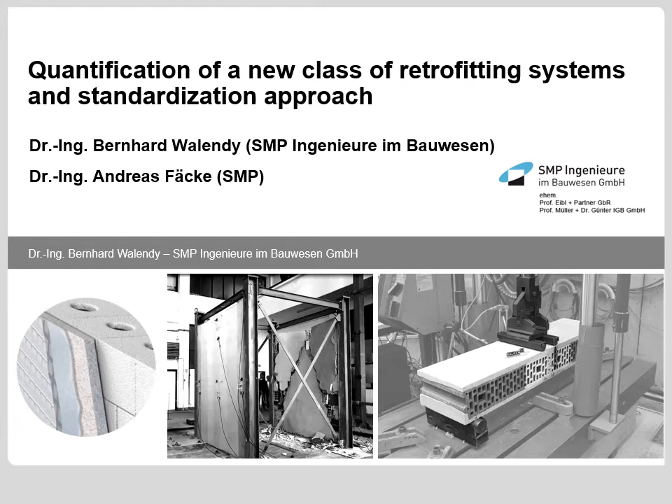Okay, let's start with the presentation. Just a very short introduction. My name is Bernhard Walendy. I'm a structural engineer at SMP Ingenieure im Bauwesen GmbH. I graduated at Karlsruhe Institute of Technology, KIT, in 2010, and finished my doctorate. I did a PhD at KIT Institute of Reinforced Concrete Structures, and the topic was about retrofitting systems for masonry. Additionally, I have a couple of years working experience in structural engineering offices, both in Stuttgart, Germany, and Karlsruhe. My special interests are concerning dynamic analysis and material testing. The presentation I'm going to hold here is mainly about tests I've been conducting during my doctorate at KIT Institute of Reinforced Concrete Structures, and it is about retrofitting systems for masonry.

Just a quick look at the overview, and let's start with the introduction. I want to start to present the basic idea of how retrofitting of masonry actually works, and I limit myself to retrofitting of masonry with fiber reinforced polymers.

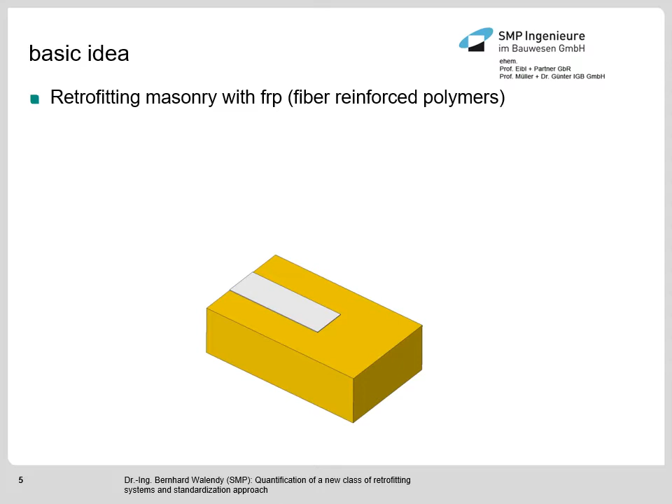This picture shows masonry stones plastered from both sides. If you want to apply fiber reinforced polymer, in the first step with standard systems using epoxy glue, you have to remove the plaster as shown right now. Then you have to apply the glue, which is in most cases an epoxy glue, and afterwards you apply the actual textile system, which is mainly carbon fiber or glass fiber.

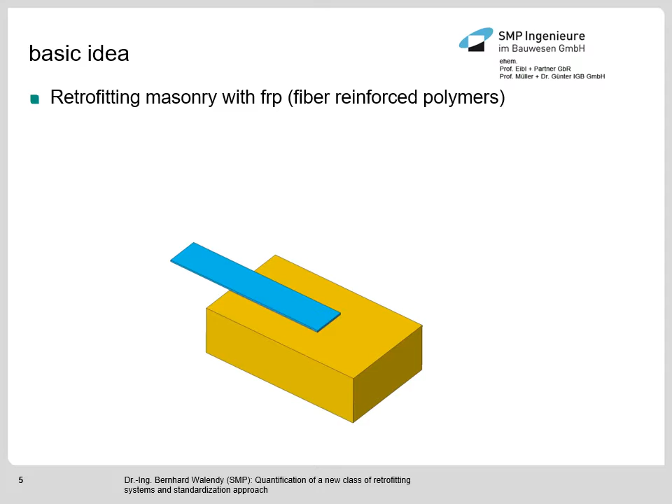Especially for non-load bearing walls, this masonry endures out-of-plane loading or bending load, and the fiber reinforced polymer stripes during the load situation have to endure tensile force, which is shown here. During this load situation, there is bond stress transferred between the fiber reinforced polymer and the masonry itself. The standard failure mode is brittle cohesive failure within the masonry stone. This is the standard failure mode for epoxy-based systems.

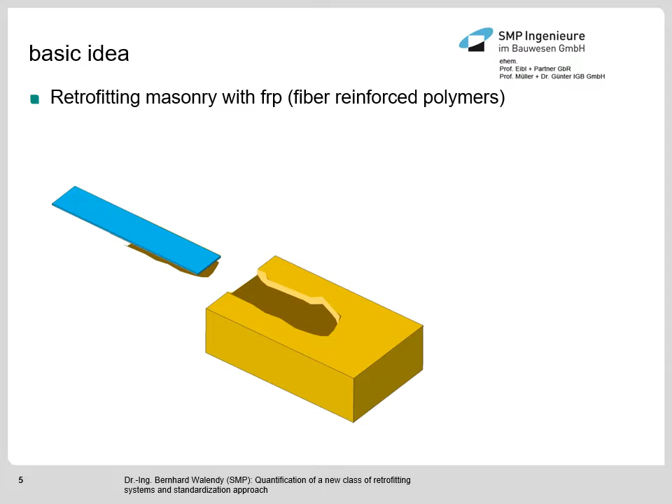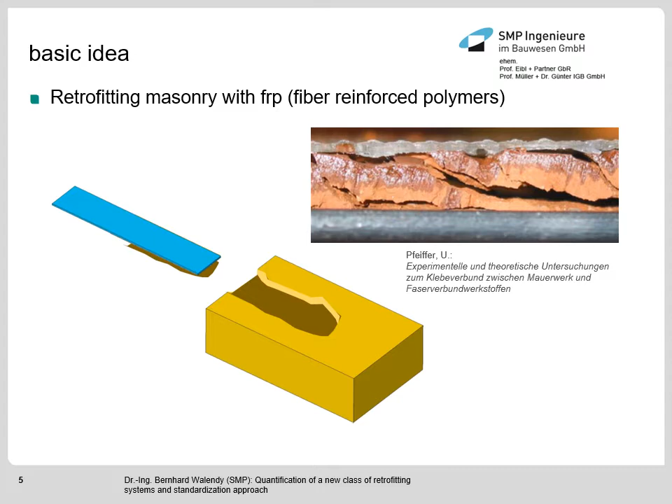Here is a photo shown from the PhD thesis of Uwe Pfeiffer from Kassel, and this cohesive failure is shown again. As you can see here, there's a fiber reinforced polymer glued on a masonry stone, and a very thin layer of masonry stone, let's say something about 1 centimeter thick, is cracked and separates from the masonry stone. This is the standard failure mode for fiber reinforced polymers if you use standard glue, which is in most cases very stiff epoxy glue.

The retrofitting system I want to introduce within this presentation, which has been developed at the Institute of Reinforced Concrete Structures, is called the seismic wallpaper. The seismic wallpaper differs strongly from commonly used fiber-reinforced polymer retrofitting systems, as it is applied directly on the plaster, and you don't use stripes, you apply the full surface.

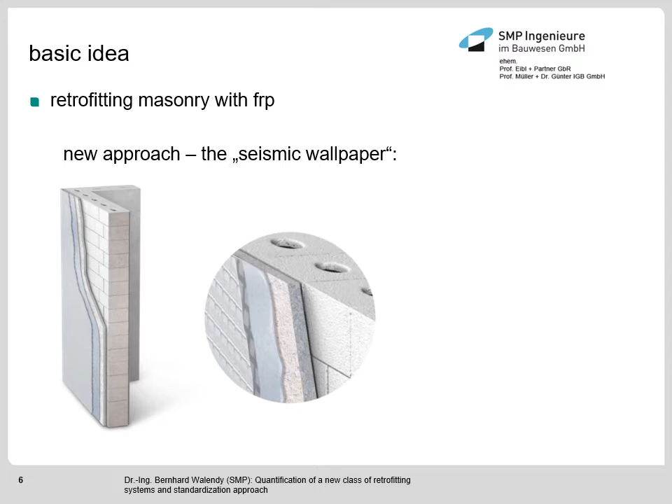The main distinguishing feature of the seismic wallpaper is the mechanical properties of the glue. Polyurethane dispersion is used, with an elastic modulus of around 6 to 9 Newton per square millimeter. This is a very, very soft glue, and it behaves almost like an elastomere. Also quite important to mention is that the glass transition temperature is below 0 degrees Celsius, which really distinguishes it from epoxy systems that have glass transition temperatures somewhere between 50 and 80 degrees Celsius. So this glue is used above its glass transition temperature, and this is the main feature of the system.

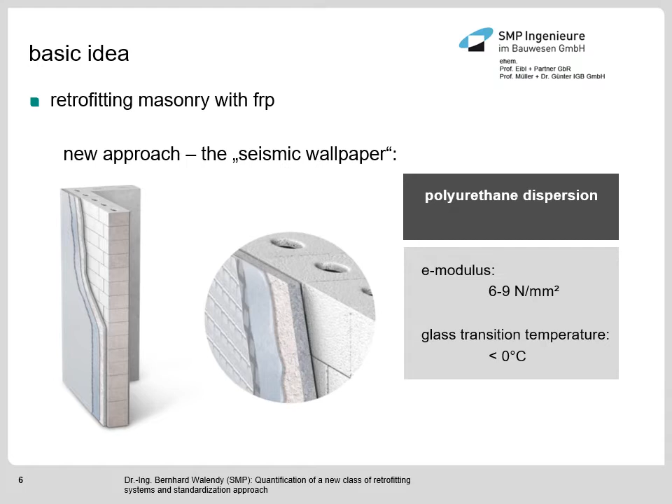I want to show you why these special material properties of the glue are so important to the system. Despite the very, let's say, exotic material properties of the glue, the system itself works.

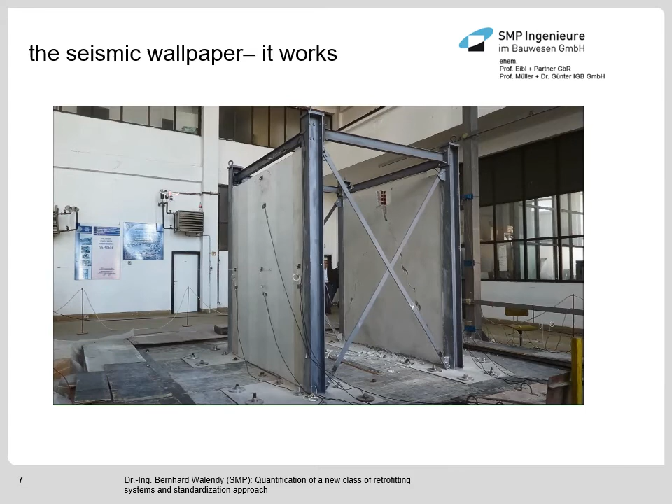Let's have a quick look at the basic principles. Why do soft glues actually behave so well for masonry systems? That's because we remember the standard failure mode is a cohesive and very brittle failure mode, which is governed by the tensile strength of the masonry stone.

The key in order to improve the mechanical properties of the applied textile retrofitting systems is to reduce maximum shear stress peaks which are transferred between the textile retrofitting system and the masonry block. Now let's analyze the distributed shear stress along a fiber reinforced polymer under an applied load, indicated with F. We have a look at two configurations, one soft glue configuration and a stiff glue configuration. For the same load, you can see here the maximum shear stress peaks can significantly be reduced by the use of a soft glue.

It's like the weakest chain within the mechanical system, due to the brittle cohesive failure mode, could be fixed, let's put it like this, by the use of a soft glue.

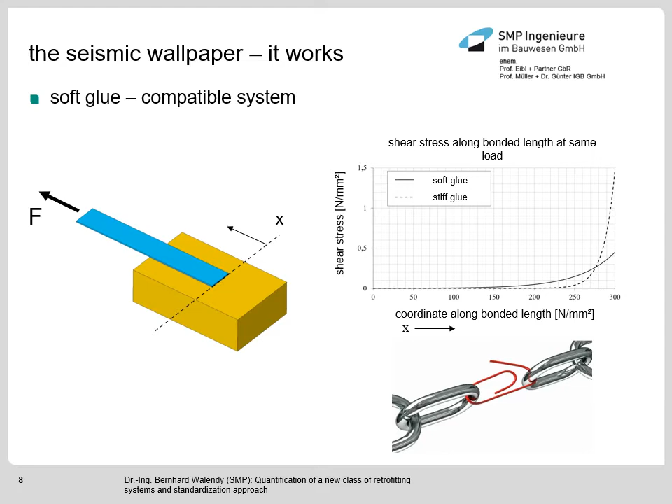So these are the basics, the main working principles of the seismic wallpaper, but I also want to mention there's a huge field of applications for it. Especially, it has been developed for indoor walls, non-load bearing indoor walls, which mainly endure an out-of-plane or bending loading during an earthquake situation.

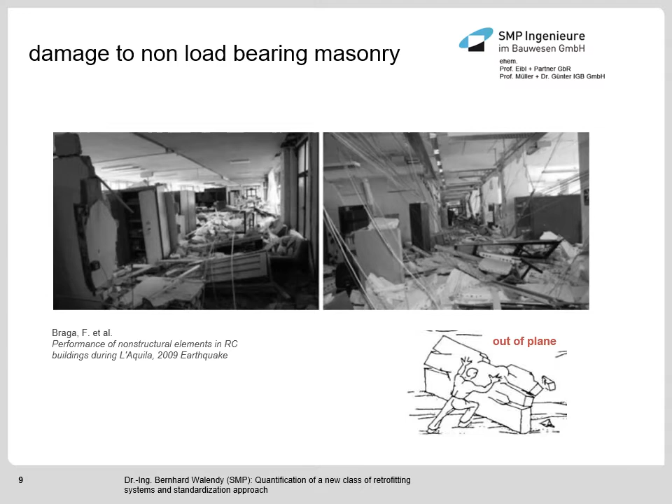There are some regulations on national level in Europe for how to quantify the reinforcing effect of fiber reinforced polymers for masonry. One of the most prominent is the Italian regulation CNR-DT, and here the formula to quantify the maximum force which can be transferred to a fiber reinforced polymer before debonding starts is shown on the upper left corner. The maximum force is mainly a function of gamma, the fracture energy, which is mainly a function of the tensile strength of the masonry.

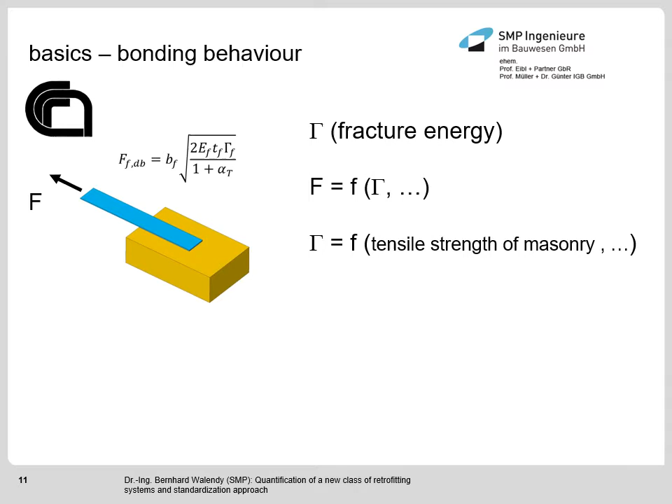As we remember, for epoxy-based systems we have this very brittle cohesive failure, and for these systems the national regulations work pretty well. But we have a very different material behavior for the seismic wallpaper, and the standard failure mode for it is not cohesive failure, it is an adhesive or quasi-adhesive failure.

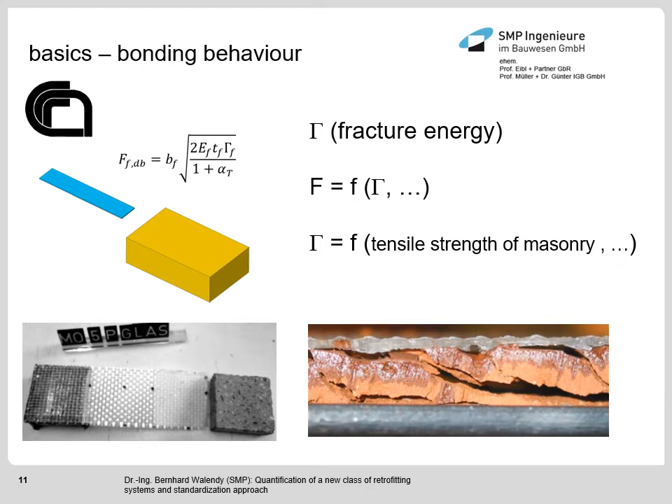As shown in the down left corner, the load carrying substrate and retrofitting system, the seismic wallpaper - you can see there was a decoupling and it was an adhesive decoupling. That is why the formulas provided in most regulations cannot be used for the quantification of the seismic wallpaper, as we don't have this brittle cohesive failure, and the formulas for quantification of fracture energy cannot be used.

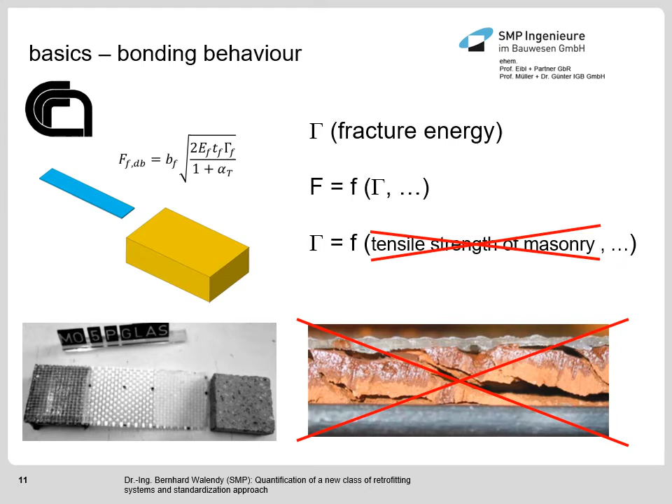So an alternative approach has to be worked on, and I want to introduce this approach. This is the most important test setup which has been used for the quantification of the seismic wallpaper. It is a single shear test with very short anchorage lengths.

This test setup was pretty easy to install, and many tests could be conducted in order to quantify the effects of testing speed, different carrier substrates, or the effect of air humidity or temperature. If you are interested in the details of this test setup and why it is actually possible to directly determine the so-called bond-slip relations, I recommend having a look at my PhD thesis.

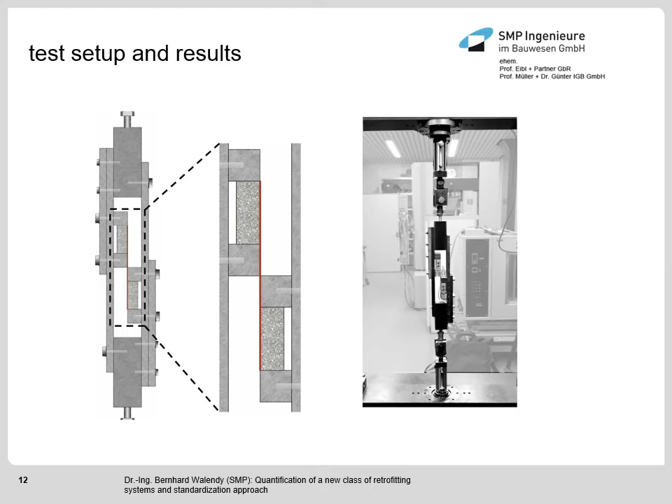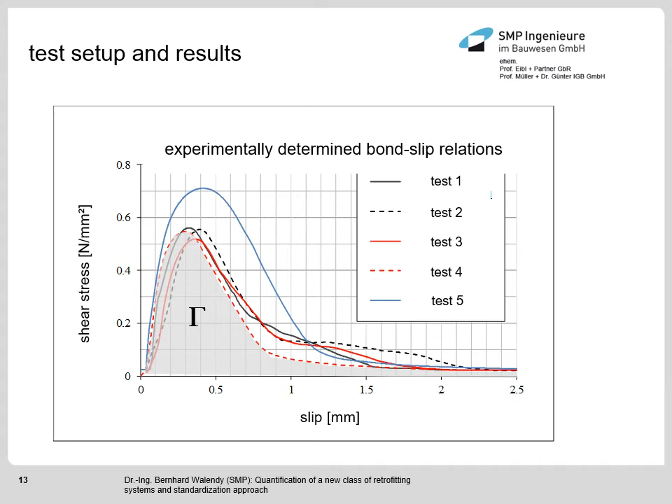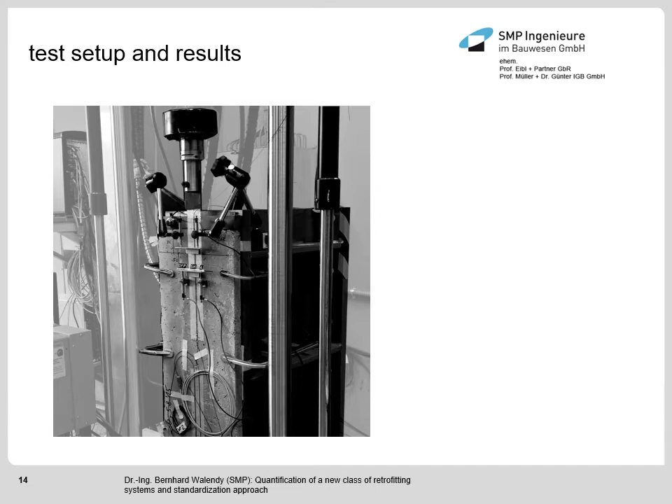Another test setup also used for the quantification of the seismic wallpaper is a single shear test, and in this case anchorage lengths of up to 800 millimeters could be realized. With this test setup, the cyclic behavior of the retrofitting systems has been examined. We also used fiber optical sensors to analyze the shear stress distribution, but that's a little too much for this presentation. Let's have a look at the results of a typical cyclic loaded test.

This is a typical result from a cyclic loaded test. As indicated here, we see the so-called global slip, the displacement at the beginning of the anchorage length, and the force. There are two things I would like to stress. The first is we have very, very large displacements until decoupling or failure takes place - something between 5 to 7 millimeters displacement until failure of the system occurs.

The second point is we have very narrow hysteresis, which is typical for fiber reinforced polymers and is completely different to reinforced concrete with steel, for example. This has severe consequences in terms of ductility of the systems, but this is something I want to get back to during a slide where I want to introduce some numerical parameter studies which have been conducted to analyze this aspect of the very narrow hysteresis.

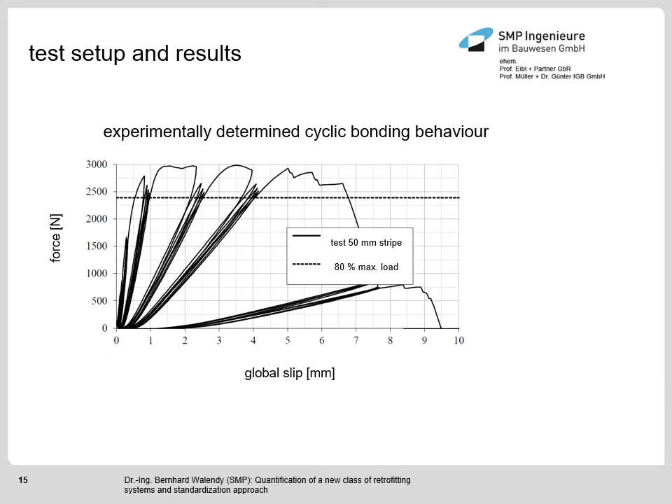There have been a lot of numerical studies conducted for the quantification of the seismic wallpaper—many finite element models analyzing behavior on component level, but also some equation solvers implemented in MATLAB. I would like to introduce the results from an equation solver which simplifies the retrofitted masonry to a single degree of freedom system.

The basic idea is to simplify the masonry under the assumption that there is one central crack forming in the center of a wall, and the material behavior which is implemented links the crack opening to a transferred tensile force within the retrofitting system.

For this material behavior, an ideal linear elastic-plastic material behavior is implemented, but we have a completely damaged system, which means after reaching the plastic plateau there is no additional energy dissipation—we have a completely closed hysteresis.

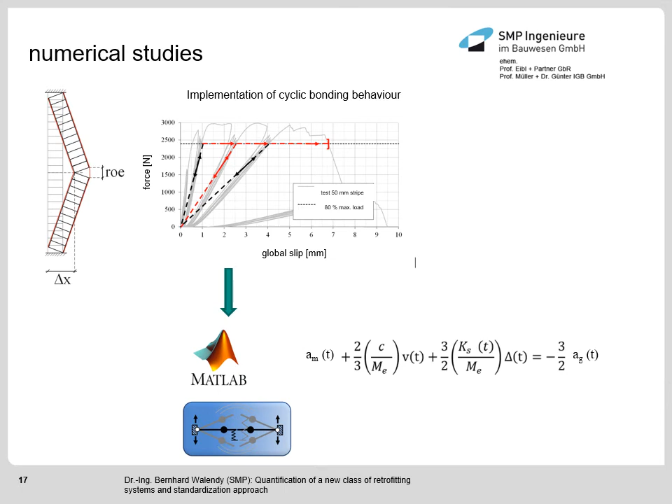Let's have a look at the results. I analyzed two settings. One setting is decoupling or failure of the system occurs at 4 mm global slip, and the other setting is an increase of global slip of 100%, so failure of the system occurs at 8 mm global slip.

Let's compare the maximum load-bearing factor for the two settings. Load-bearing factor is something I defined myself—if you're very interested in what it means, have a look at my PhD thesis—but shortly spoken, it means a comparison between the load which can be transferred doing a dynamic analysis in comparison to a quasi-static analysis.

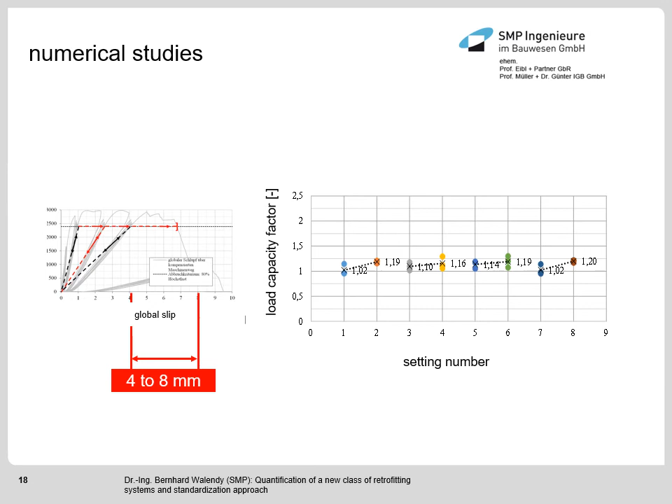So let's have a closer look. As you can see here, from setting 5 to setting 6, we have an increase of load-bearing capacity from 1.14 to 1.19, and this is astonishing.

For me, it was astonishing—it's not too much. Even though we increased the maximum global slip by around 100%, the increase of load-bearing capacity is by far not in the same range.

This is a very strong indicator that the very closed form of the hysteresis strongly affects the behavior of the seismic wallpaper. The seismic wallpaper, although it is really useful and has a lot of advantages, cannot be compared to, let's say, reinforced concrete systems with steel bars in terms of ductility. It's not comparable.

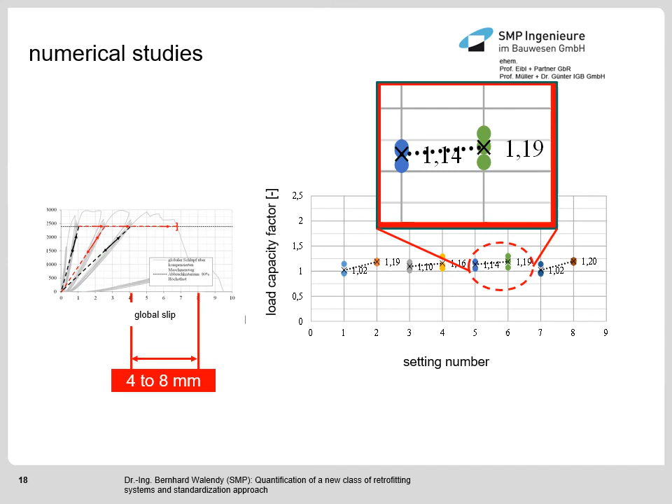So how can these results actually be used to build a quantification concept on component level? Let's have a look at the Italian regulation. There is an analogy used for masonry beams retrofitted with fiber reinforced polymers, which is actually considered like a reinforced concrete bending beam.

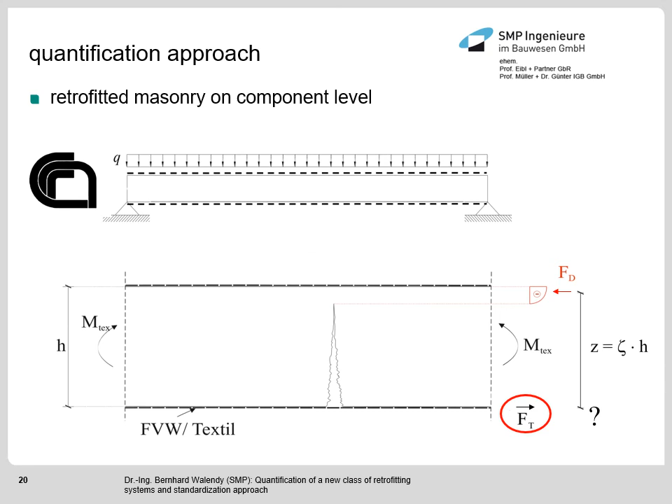We have somewhere, let's say, a crack within the masonry, and the tensile force is transferred to the fiber reinforced polymer. We have an inner lever arm, and there's a compression zone within the masonry. If you know the capacity or the compression capacity of the masonry, and if you know the tensile force of the retrofitting system before decoupling takes place, the moment of resistance on the component level can quite easily be determined.

As the seismic wallpaper is applied on the complete surface of a masonry component, and as the shake table tests have proven the very homogeneous behavior of the retrofitted masonry itself, I would like to suggest a standardization or quantification concept for masonry retrofitted with a seismic wallpaper on component level, according to Eurocode 6 regulations.

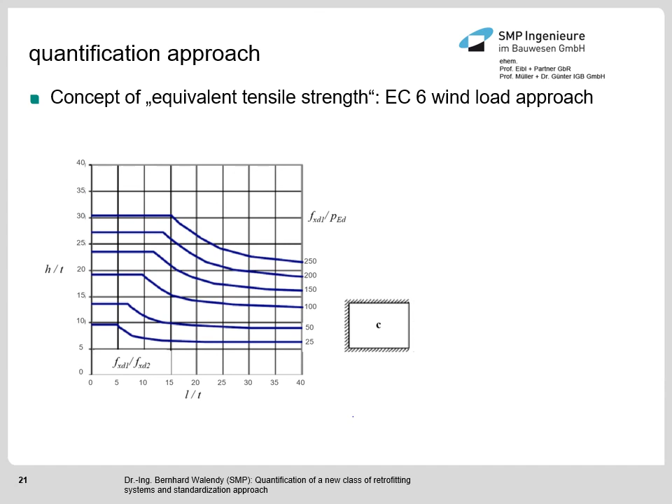Before I finish my presentation, I would also like to mention an additional field of application for the seismic wallpaper. This is a very short outlook from a project we are doing for a client within our engineering office—this is retrofitting of historical masonry facades against blast loads, which also leads to out-of-plane loading of the masonry and is a very interesting case of application for the seismic wallpaper as well.

We are actually right now evaluating if the seismic wallpaper can be used for our client's problem.